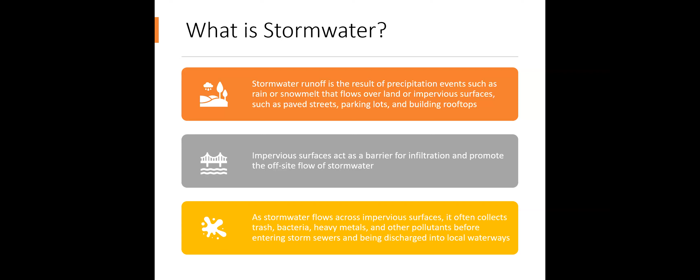What is stormwater? Stormwater runoff is the result of precipitation events such as rain or snowmelt that flows over land or impervious surfaces such as paved streets, parking lots, and building rooftops. Impervious surfaces act as a barrier for infiltration and promote the off-site flow of stormwater. As stormwater flows across impervious surfaces, it often collects trash, bacteria, heavy metals, and other pollutants before entering storm sewers and being discharged to local waterways.

Historically, communities have utilized a system of gutters, pipes, tunnels, and basins to collect and transport stormwater. Also referred to as gray infrastructure, these systems focus on transporting stormwater flows away from the built environment and to local receiving waters.

In many locations throughout the country, the gray infrastructure network is aging, and the capacity to successfully manage stormwater flows is decreasing. In addition to aging infrastructure, the frequency and severity of weather events is surging, resulting in greater flows and increasing strain on stormwater systems.

To address these concerns, communities are utilizing various forms of green infrastructure techniques to increase system capacity.

While the primary focus of gray infrastructure is to manage stormwater volume, green infrastructure protects, restores, or mimics the natural water cycle. Green infrastructure captures and filters stormwater where it falls through the utilization of plant or soil systems, permeable surfaces, and stormwater capture, promoting infiltration and evapotranspiration. Green infrastructure provides a method to address both stormwater quantity and quality.

Some of the benefits of green infrastructure include improved water quality through infiltration and reduced stormwater discharges, reduced flooding, improved air quality through the installation of new plant material, increased wildlife habitat, reduction of urban heat island effect, new employment opportunities, increased property values, and new opportunities for passive nature-based recreation.

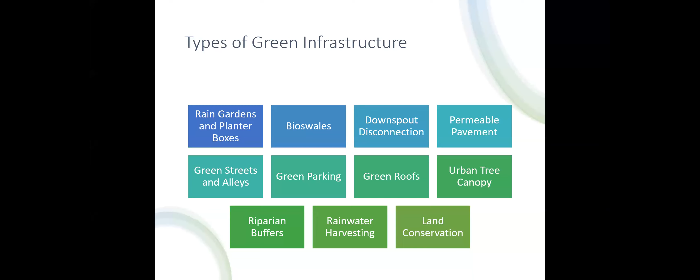Planter boxes are very similar to rain gardens, and they are constructed with vertical walls, best utilized in urban locations where space is limited. They promote the capture and temporary ponding of stormwater within the planter, allowing slow infiltration. During large precipitation events, excess capture is designed to flow through the planter into a location where it can infiltrate soils or enter the storm sewer system. These can be a valuable tool for beautification in urbanized areas.

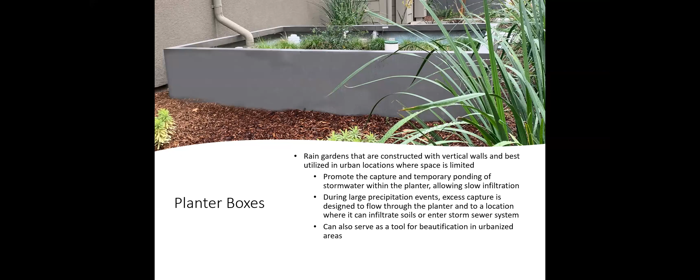Bioswales are long, shallow depressions that capture stormwater runoff and are often located along roadways, curbs, and parking lots. Vegetation and natural materials within the bioswale slow stormwater flows, promote infiltration, uptake, and filter runoff. Different than a ditch or a swale, bioswales incorporate and promote bioretention, the process in which contaminants and sedimentation are removed from the stormwater.

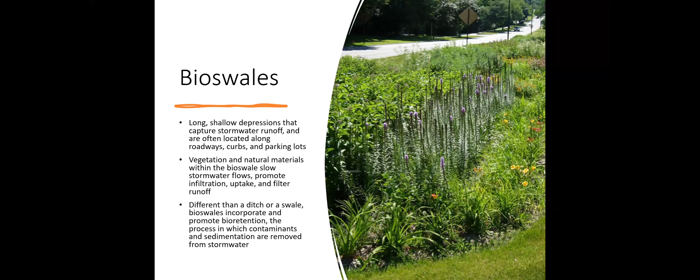Downspout disconnection and rainwater harvesting. This process uses the rerouting of downspout flows into rain barrels or cisterns, where it can be reserved for later use or directed to permeable areas on site where it can infiltrate soils. If striving to promote infiltration, it is important to ensure that the designated location can handle these flows, and the redirection of these waters will not negatively impact adjacent homes or infrastructure. This provides a cost-effective alternative for individuals seeking to address stormwater in a specific location, such as a private residence.

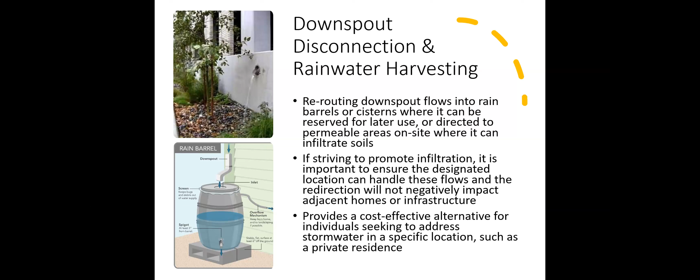Permeable pavement can be utilized as an alternative in locations where impervious surfaces have or are planned to be installed. These permeable surfaces promote infiltration, treatment, and storage of rainwater where it falls. These materials can include pervious concrete, porous asphalt, or permeable interlocking pavers.

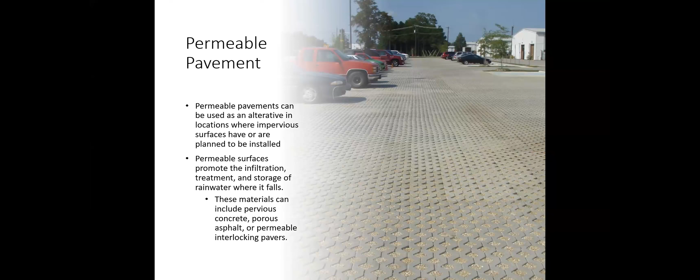Streets and alleys represent a significant percentage of impervious cover in developed localities. Green streets and alleys are designed and developed by the integration of 2 or more green features. In addition to stormwater management benefits, this technique can be utilized to effectively address urban revitalization, beautification, and pedestrian travel.

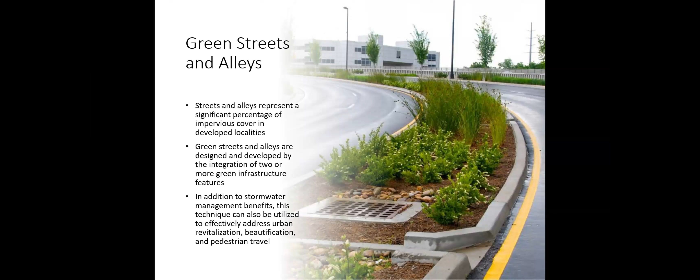Green parking generally consists of large quantities of impervious surfaces, and green infrastructure elements can be easily integrated into parking lot design and construction. Green parking lots may include features such as permeable parking surfaces, planted islands, improved tree canopy, and bioswales. In addition to addressing water quality and quantity concerns, larger vegetation will provide shade and drastically reduce surface temperatures within the parking area.

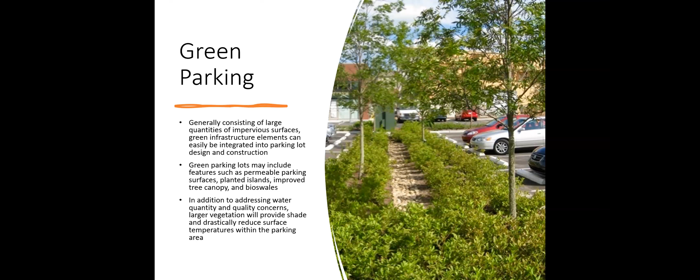Urban tree canopy: trees absorb and filter stormwater while improving air quality and reducing surface temperatures. Many communities have target numbers for tree canopy cover and strategically work to plant new trees in locations where they have been removed or the density is insufficient. Urban tree canopy improvements provide a great opportunity for community engagement and participation.

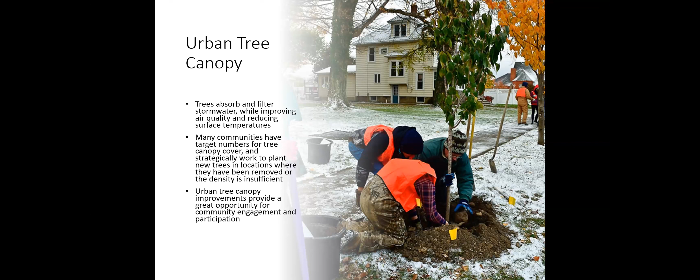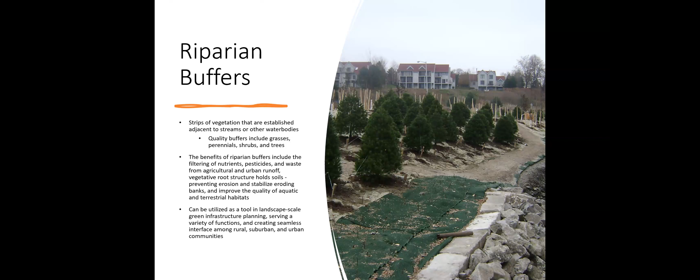Riparian buffers are strips of vegetation that are established adjacent to streams or other water bodies. Quality buffers include grasses, perennials, shrubs, and trees. The benefits of riparian buffers include the filtering of nutrients, pesticides, and waste from agricultural and urban runoff, vegetative root structure that holds soil, preventing erosion and stabilizing eroding banks, and improving the quality of aquatic and terrestrial habitats. Riparian buffers can be utilized as a tool in landscape scale green infrastructure planning, serving a variety of functions and creating a seamless interface among rural, suburban, and urban communities.

Rainwater harvesting systems reduce stormwater volume by capturing runoff and reserving it for later use or release. These systems can be implemented at various scales, from a rain barrel at a private residence, to a commercial cistern and aquifer.

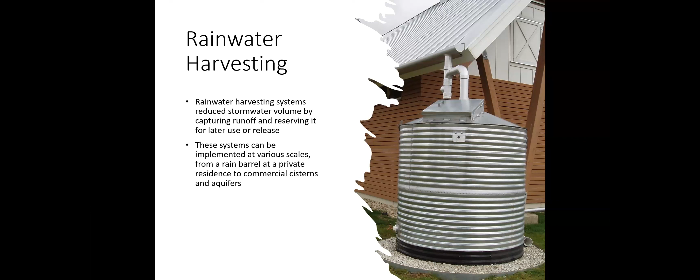Land conservation. Water quality and flooding risk can be addressed through the protection of open space and sensitive natural areas. Target conservation locations to address stormwater concerns include riparian corridors and floodplains adjacent to streams, wetlands, and steep slopes. Land conservation efforts may also provide increased recreational opportunities for residents and visitors to your community.

Conservation design is development planning that considers the natural landscape and the ecology of the site, facilitating development while preserving the natural features that provide the greatest value and functionality. Conservation design principles include flexibility of lot size and building footprint, thoughtful protection and management of key natural areas, reduction in impervious surfaces, and the incorporation of various green infrastructure features.

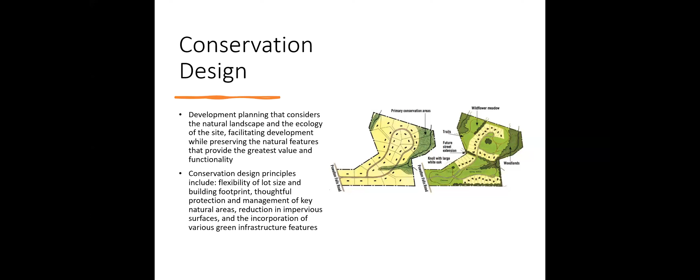In summary, green infrastructure provides a host of naturalized alternatives to address stormwater quality and quantity concerns. It can be utilized to increase a community's stormwater management capacity by supplementing the gray infrastructure network. It can be incorporated at various scales and locations, addressing the emerging needs of a particular site or the community as a whole. And installation and maintenance of green infrastructure may increase opportunities for community engagement and participation.

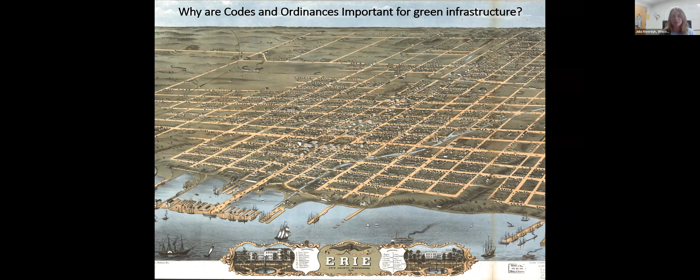And oftentimes they'll discourage, indirectly or just completely prohibit, the use of green infrastructure. Some examples of codes or ordinances that they found are places in the code where it directs people how to tie up their horse properly downtown, or different parking space regulations for men's and women's department stores. So these are the kind of things that the code audit is looking to address.

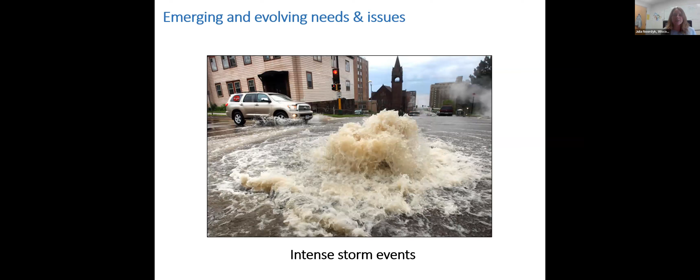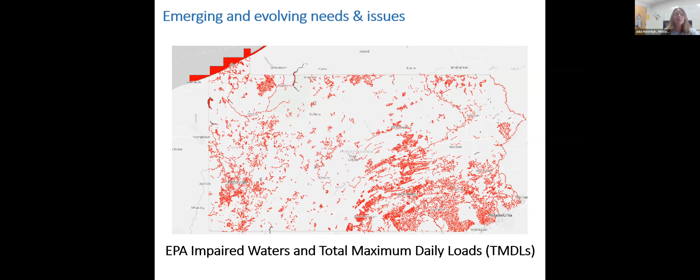There's also a lot of other emerging and other needs that ultimately involve local codes and ordinances. So many communities have to update their stormwater permits. We're dealing with more intense rain events and other hazards. And we have a lot of communities in the US, especially in Wisconsin, dealing with impaired waterways and developing TMDLs, total maximum daily loads. We also have changing technical standards.

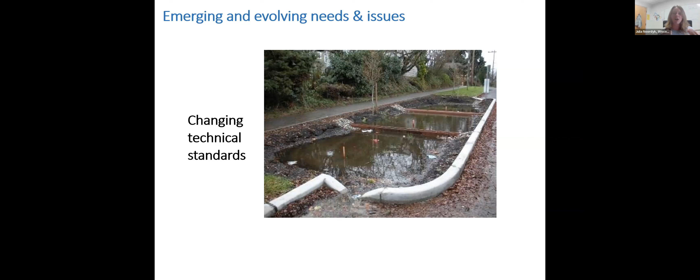This is an example of a failed bioretention system. And so when things fail in a community, especially green infrastructure, it kind of has long-lasting impacts. So we don't want those things to change, so getting those technical standards correct is important. Green infrastructure, many of them are in general newer technologies, and they're evolving constantly. So really not having such a restrictive code, but thinking more about how we can evolve with the technology and get it right. So again, we're not having failed projects.

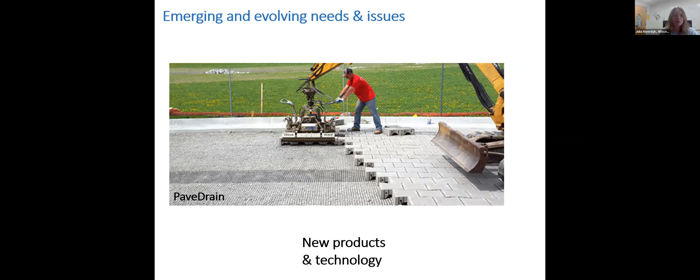So there are some really big factors that have to do with the culture and how things are decided in a community. One is, I'm sure we've all had the experience, maybe there's someone in the community who's ready to go, 'let's make this city green and put in all this green infrastructure.' A lot of mayors are really excited about doing green infrastructure. But what happens when the election doesn't turn out the way, or they decide to run off to Mexico and retire from their position? There's turnover in a lot of these elected positions, or even in staff. So one thing we really want to think about is how are green infrastructure changes in these processes codified moving forward? How do we create that legacy?

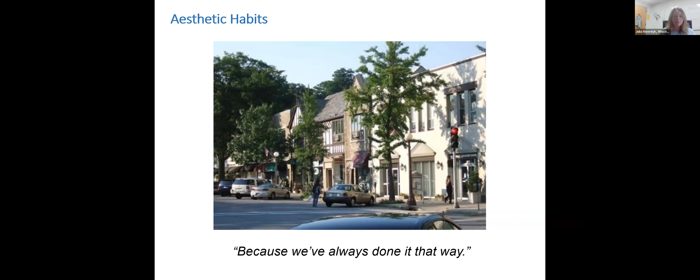So we want to help, in the codes and ordinances, get credible information that helps really make our projects successful. One of probably the biggest barriers is this culture of resistance, or 'I heard it failed somewhere else,' 'we have clay soils,' 'we have freeze thaw cycles,' 'it failed in Wauwatosa.' These are really big things that communities need to overcome, but that codes and ordinances can help with.

So why are codes and ordinances important? Really what it comes down to is if the code language is not clear that green infrastructure is an acceptable or preferred approach to managing stormwater, it will not likely be considered in development projects, capital projects, or site design planning. So it's something that needs to be thought about right at the front if a community wants to do green infrastructure.

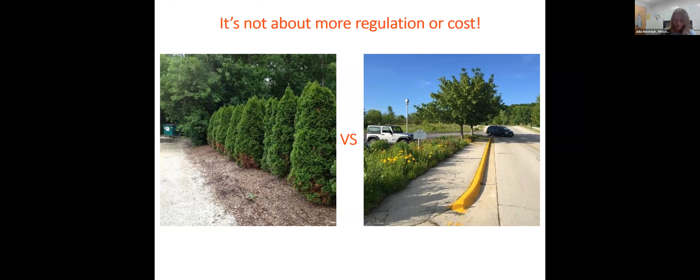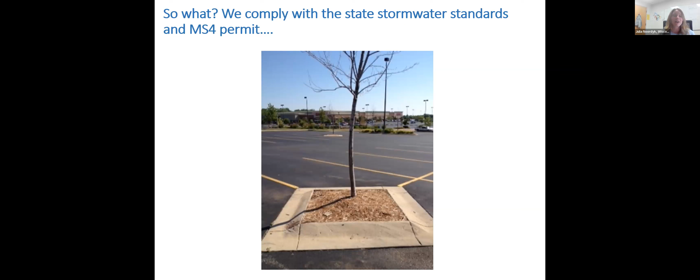And no one wants to see that. So

When we know that working with codes and ordinances, they can be pretty ambiguous and kind of hard to understand when we're talking to folks. And it's not really clear, like, do they actually matter? Are they going to actually make an impact on water quality here locally?

So as part of this project, it was really important to demonstrate the impacts of code changes on the landscape. So we modeled using the modeling tool called WinSlamm, which is used for the statewide stormwater permitting in Wisconsin, to look at, so we take a code revision.

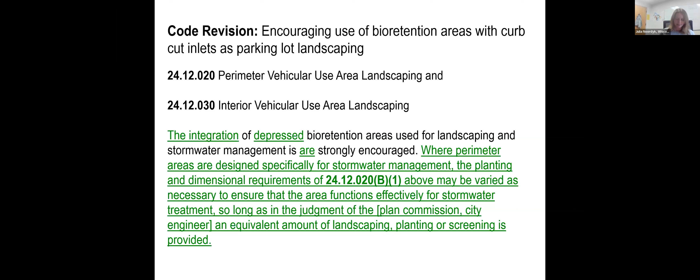Unless you're a planner on this, maybe you're really excited to read this, but for most of us it's going over our heads and it's like blah, blah, blah. So we took that code and basically asked, if we redevelop this site under the new code, what would the impact to water quality and water quantity be?

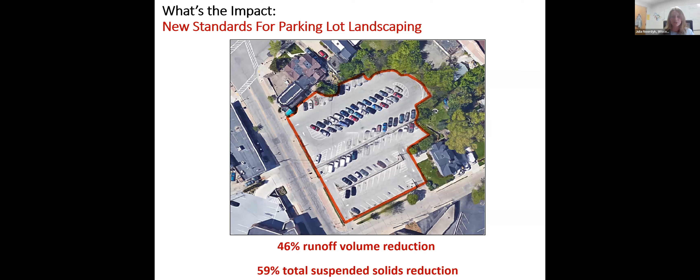For example, that was about new standards for parking lot landscaping and including bioretention. So this parking lot, almost a half acre, redeveloped with an additional 2,300 square feet of bioretention, is going to reduce stormwater volume by 46% and our TSS, total suspended solids, by 59%. So some pretty big impacts.

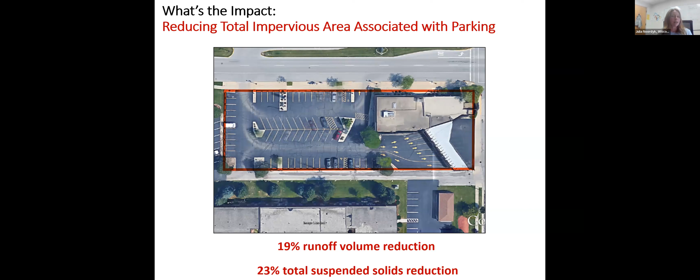44 spaces instead of 64 will reduce 21% of impervious cover at this site, and then have a pretty big impact just alone without bioretention, just from reducing impervious surfaces. So almost 20% runoff volume and 23% TSS reductions.

And then the last one, there's more in the workbook. Oh, and I was going to put our link to the workbook in there, but I forgot to do that. So maybe Tom can do that if he has it on hand. But we have also, one of the other things, there are several examples in there.

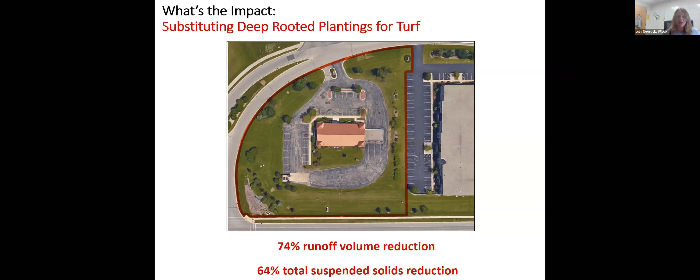The last example today is just replacing turf grass with native vegetation, those deep-rooted plants that soak up and infiltrate into the ground. This is a commercial development site, 1.74 acres. Without doing any other stormwater best management practices, just replacing the turf grass on this property with native vegetation would reduce runoff volume by almost 3/4 and reduce total suspended solids by 64%. If you add bioretention, the modeling shows 100% of runoff is addressed. So just replacing turf grass with native vegetation can really make a huge difference.

So yes, absolutely, codes do matter, and we can definitely do better. Implementing simple code changes can make a really big difference in volume and pollution loading if sites are tweaked. So many little things can improve water quality outcomes throughout a community.

So we developed this workbook. It's written for use by county and municipal staff with particular roles in zoning, land use, and stormwater. I think a lot of the people that tend to use it are nonprofits working with communities, or extension people like myself working with communities, who want to do a code audit process. This is really meant to help identify barriers in your codes and ordinances, and then help prioritize where those code amendments could be made.

So what makes this audit unique? Well, we really understand that all communities are very unique. Codes and ordinances vary widely across communities, and all communities have different goals and objectives, so no one code is going to help reduce the barriers to green infrastructure. When we look at this, there's not really one answer. You have to look at the wider picture, and understand how green infrastructure fits within the context of the community. Communities are unique, they have different culture and goals and needs.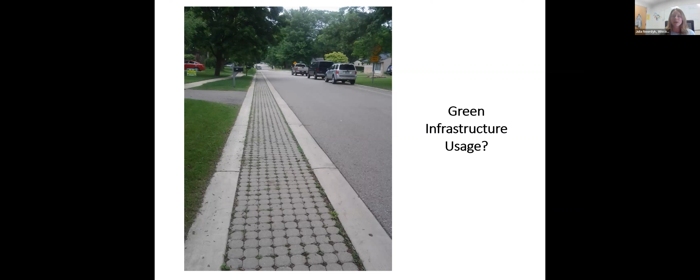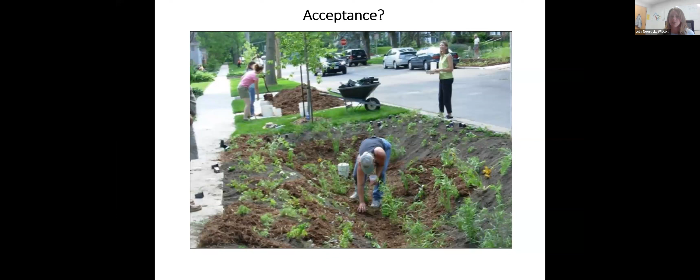And then also community acceptance in general, like what kind of neighborhoods do you have? A community that's open to maybe integrating some of these new practices, or maybe you have neighborhoods with more uniform looks, where some practices might not be accepted as much as others. So really thinking about what makes you unique, and what would work and what might not work in your community.

What also makes this audit unique is it's really down in the weeds. It's a pretty involved process, and it also has nuanced ranking. Oftentimes we'll ask a question about a code or ordinance, and it could be yes or no, but there's a wide range of other possibilities it could be.

For example, is permeable pavement completely allowed in the community or not? But sometimes codes are in conflict with each other, or maybe the code doesn't even mention this type of practice. Even when the code is silent on green infrastructure practices, it can be a barrier because no one's going to think about it or want to design something like that.

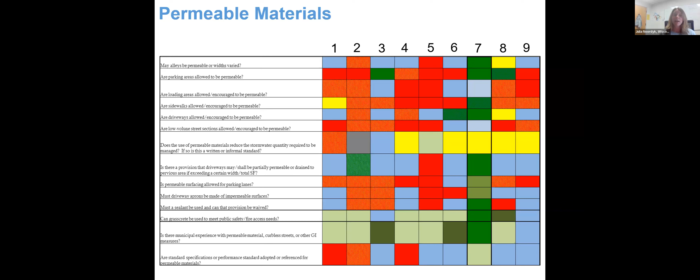This is an example of doing code review for permeable materials. Those columns 1 through 9 are different communities, and there's a list of questions related to permeable materials, with a nuanced response. You can see community 7, you can pretty much go and install permeable sidewalks and pavers. But in community 5, for example, you have some pretty serious barriers to not being able to do that.

One other thing that makes this audit really unique is that it helps start breaking down silos. When you're working on the code audit, green infrastructure spans engineering and planning, and all those people have to be at the table to talk about these issues. You really get the conversation started between all the different departments, including parks and code enforcement.

There are 15 different code topics ranging from stormwater management, zoning - a really important one, public works standards, parking, permeable materials we already talked about, and landscaping. So many different areas of the code to touch on.

Some of the key strategies - there are 4 main strategies when looking at codes and ordinances to help green infrastructure that can improve water quality and reduce impervious surface. One of them is reducing impervious surfaces and maximizing vegetated landscape.

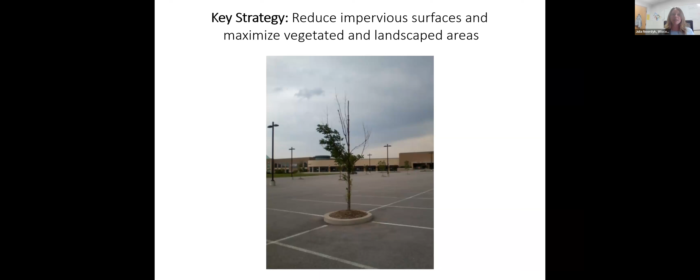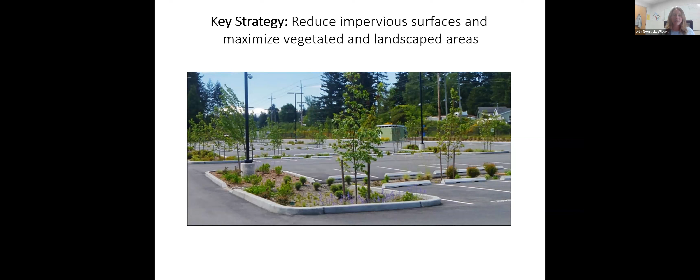Again, we have a not very happy tree here, but we want something like this. I think Tom had some great pictures of parking lots with green islands also. And where does everyone want to park when they go to a parking lot?

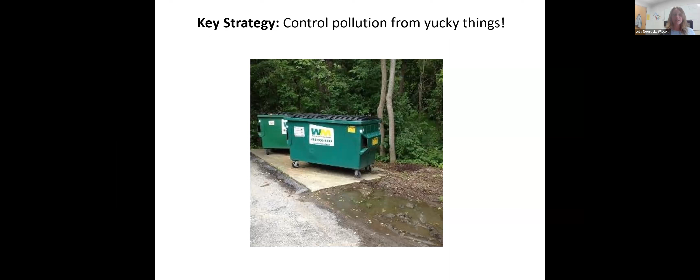Another key strategy is controlling pollution from yucky things. This dumpster was responsible itself for bacteria getting into a local waterway and a beach closing just downstream. It took them a long time to figure it out, but when we have not well managed sites like this, you have birds doing their thing, and animals getting in there, and then they become contaminators. Other places that need special consideration are like doggy daycares, or places where you get your oil changed - places where you don't want direct stormwater runoff coming off these sites going directly down the storm drain.

One of the most important strategies too is clarifying the intent and purpose of your codes to encourage the use of green infrastructure. Think about your comprehensive plans, your purpose statements and zoning districts, stormwater management plans. How can we explicitly say in the codes that when a developer comes to our community, they know we are serious about water quality and using green infrastructure? These things are really important on the upfront end, and they also help to codify it in the long term. Again, when staff or elected officials change over, the work can continue in this area.

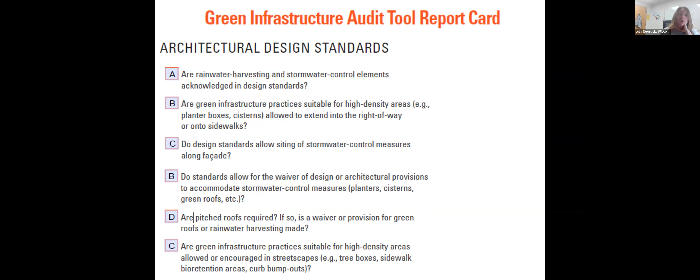Ultimately, the report card will help the team identify areas that are critical to where barriers exist. Those codes are identified, and they're a logical starting point for communities, but likely there's probably a lot of changes needed. So where do communities go from there, and how do they actually figure out what to prioritize for amendments?

Well, again, you're going to bring this puppy back - the scoping information that you gathered at the beginning will really help you inform a developing approach that fits your community. So maybe permeable materials are really desired, or a certain practice doesn't work as well as another. This in turn can inform any public outreach and so forth.

It's really where you want to reference what makes your community unique and where green infrastructure fits. How does green infrastructure meet your goals, really? Do you want more green space, or do you have that waterfront that you really want to focus corridors on, or something like that? Really thinking about how green infrastructure fits into the context of your community.

Thinking about current and future redevelopment in general, development pressures can really help determine which amendments to prioritize. So is your community built out completely?

If so, you might want to think about shared parking, permits for permeable materials, green roofs, planter boxes, things that can go on the facades in general.

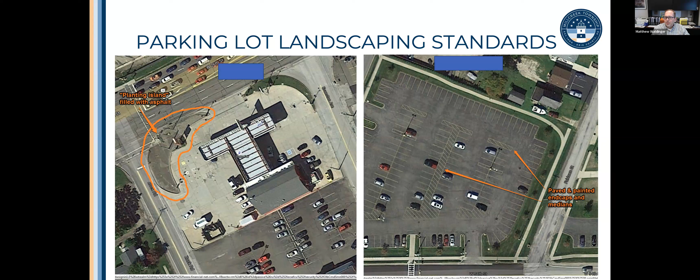So like I said, we didn't have a regulation that prohibited it. And so they gave us what they gave us. So how did Millcreek fix that?

Well, we made an edit to our zoning code in 2012. We added this sentence: in parking lots of half an acre or larger, at least 5% of the total parking area shall be devoted to landscaping. That was it. That was zoning code section 3.17.2. We thought we were done, right? Mission accomplished.

Well, here's what we got. And I'm not afraid to shame this large retailer. This is Walmart. We did end up with 5% of pervious area within their parking lot. We were lucky to get some grass on the perimeters, but you see a lot of those end caps were just curbs with some mulch in them. That was it. That's what they considered their landscaping.

So you kind of have to watch. One of the big things we missed in 2012, we had no definition for what landscaping was. And in the absence of that, it's a free for all, and we're going to get what we're going to get. Even when some developers did it right, we still got some unintended consequences.

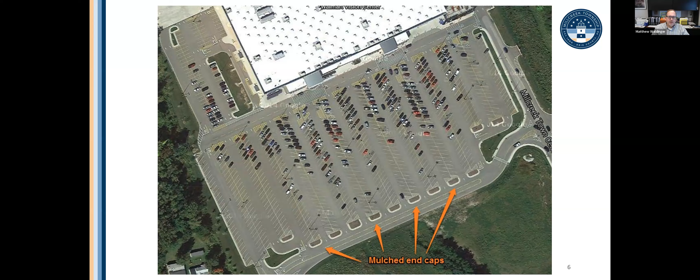I think it's understandable—developers have to look at the bottom line and maintenance responsibility. Sure, stone is easier to maintain, you don't have to replace it as often as mulch, and you obviously don't have to mow it. So unless you ask specifically for what you want to see, you're not going to get it.

As part of our process, we researched some ordinances in Pennsylvania and compared them to our current ordinance. We picked three in particular: Pottstown Borough, the City of Pittsburgh, and Cranberry Township. Compared to our ordinance, we saw a lot of differences.

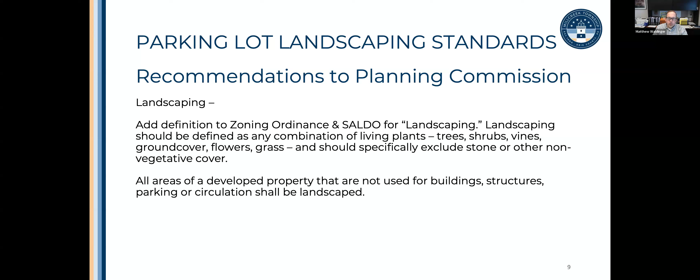Then as far as parking lot plantings themselves, we went with the planting or pervious area model. So we require 1 planting island with a minimum pervious area of 17 feet by 12 feet for every 15 parking spaces. And then we require an end cap with a pervious area of 15 feet by 12 feet at the end of each row, and 1 deciduous street tree at minimum in each planting island and end cap. I know saying 1 for every 15 spaces doesn't sound like a whole lot, but if you think about a row of parking with say 16 spaces, you've got the planting island in the middle, plus one on each end cap. So that's a total of 3 trees minimum for 16 spaces. We're right in that 1 for every 5 parking space kind of ratio.

Another thing we borrowed from Cranberry is the planting median. We require a 15-foot wide pervious area between every 3rd parking bay if you have multiple bays. If you don't know what a parking bay is, picture driving down an aisle to park with spaces on your left and spaces on your right—that's a parking bay. So if you have 3 of those, you can't have a 4th without putting a 15-foot wide pervious strip between them. And in those strips, you have to have deciduous trees every 35 feet on center, and then a grouping of 10 shrubs or bushes for every tree, either clustered around or in rows in between.

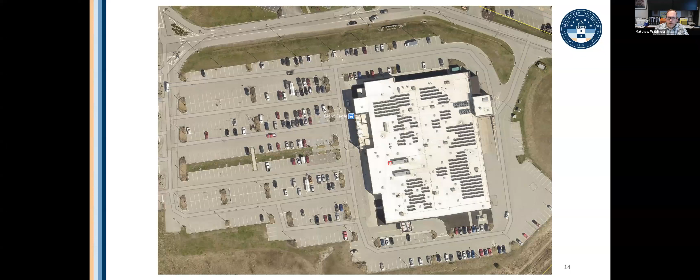I wanted to show this one too—this is a smaller office that was built. It did not reach our threshold of a parking lot over half an acre. I think I forgot to mention that one of the other things we added was that any parking area of half an acre or more needed at least 7% of its interior to be pervious. If you could get there with what we required for the end caps and planting islands, great. But if not, those had to be increased in size, or additional ones added, to get to that 7%.

I wanted to show this one because this is a small office that did not reach that half acre parking requirement, but we still see a benefit just with the end caps, the parking islands, and the trees that are planted adjacent to any new parking spaces. So it does show a benefit even in the smaller parking lots.

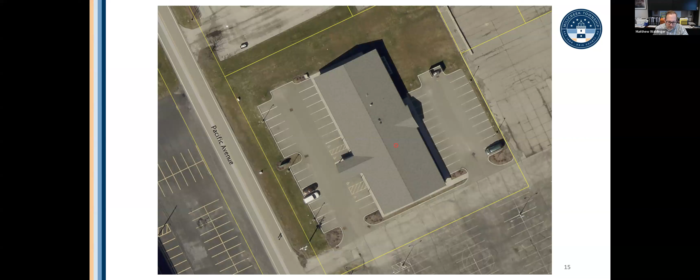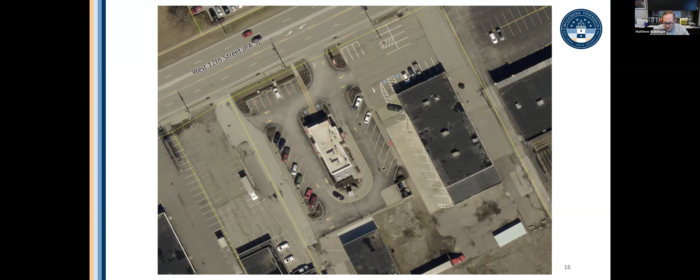So to summarize, it's not that hard to make small changes that produce results right off the bat. You just have to be willing to spend a little time, and you don't have to prepare yourself for that huge dive. If you see some small changes that you can implement, go for it. It doesn't take that long.

I will have to give a big shout out here to eCode, their website there, ecode360.com. They do have a multi-code search, and it's a great resource. It allows you to search and filter your search for any of the codes that they publish. You can do it by state. You can also include county, and you can include municipality type. So for us, if I wanted to search a term in every Pennsylvania second-class township code that they have, I could do that. If you were in New York State and a village and you wanted to search a term in every village in New York State, you could do that. So that's a great resource, and it helps you see what other people are doing and how you can craft your ordinances.

As I mentioned, make sure you're following your state guidelines, not only in the adoption process, but also in the regulations themselves. Land use ordinances can have some specific things that you can and can't do. One of the things that Pennsylvania allows is requiring financial security from developers for required improvements within their developments. That's for stormwater management features and sidewalks and things like that.